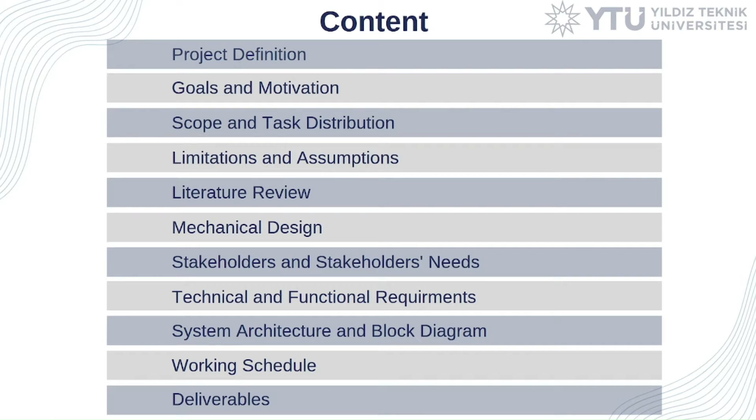Project definition. In this project, we aim to design and produce a 1/10th scale shared autonomous vehicle prototype. This vehicle will be able to travel to the passenger location with no human involvement, and the location will be provided by the user interface. The shared autonomous vehicle will perform operations such as lane tracking, classifications of objects, and path planning.

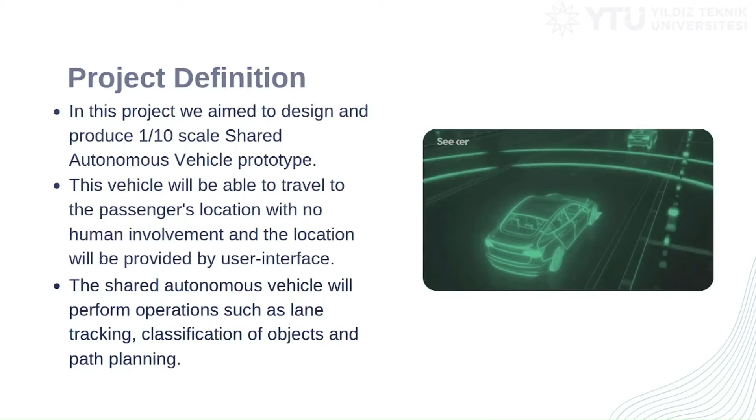Goals for the project: lane tracking with perception system, simultaneous localization and mapping, path planning, requesting the vehicle with a mobile application, and instant location tracking. Motivations for the project: bring a solution to traffic congestion, especially in large cities, with a shared autonomous vehicle culture, minimizing carbon emissions by reducing the number of vehicles in traffic, and preventing human-related accidents in traffic with the autonomous shared vehicle concept.

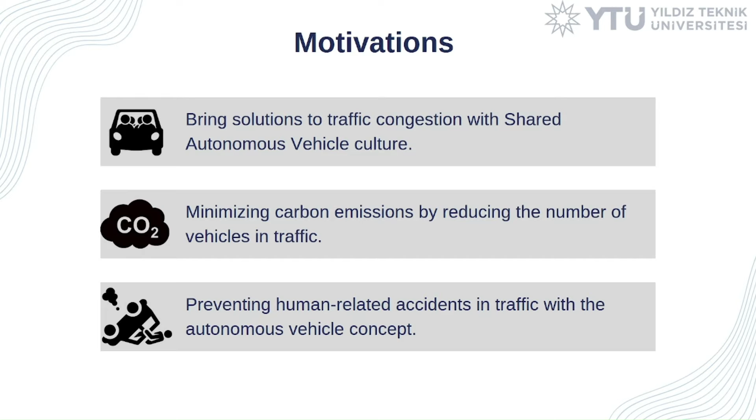Scope of the shared autonomous vehicle. This part consists of 8 subsystems. Power management subsystem, mobile application subsystem for design of the mobile application, driving subsystem for one brushless DC motor and one servo motor, and we will design and produce a motor driver card.

Motion control subsystem, lateral control with pure pursuit algorithm; communication subsystem, communication between our mobile application and vehicle; decision-making subsystem, simultaneous localization and mapping or SLAM, and path planning. Perception subsystem for object detection and classification, image segmentation, lane tracking algorithm, obstacle detection, and depth camera. Mechanical subsystem, 3D modeling of the vehicle, structural and stress analysis of the vehicle.

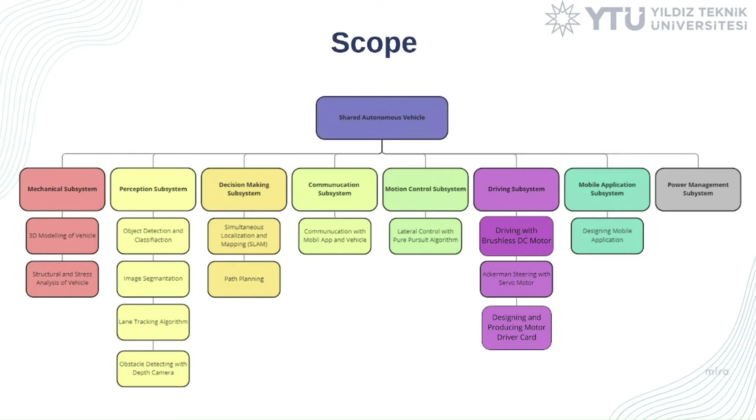Task distribution of the shared autonomous vehicle. In this part, each subsystem has a leader. Although all the members will participate in all the areas, the specific leader for the specific subsystem will lead and guide other members and will plan the progression.

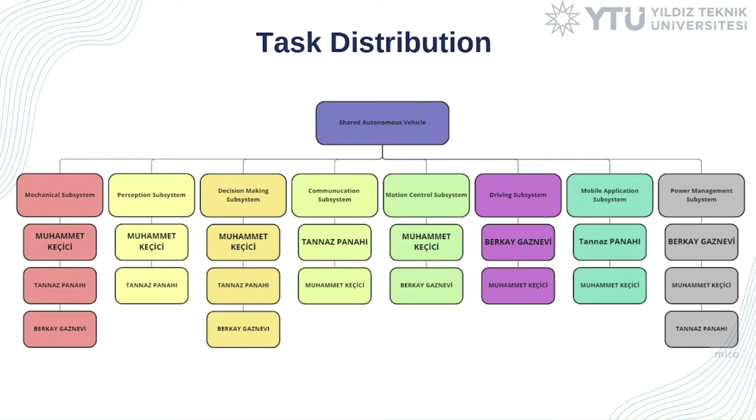For example, in mobile application and communication subsystems, which are led by me, I will be planning and mostly guiding the other members. Power management subsystem and driving subsystem are led by Berkay Gaznevi. Motion control subsystem, decision-making subsystem, perception subsystem, and mechanical subsystem are led by Muhammet Keçici.

Limitations and assumptions. It's hard and costly to design and produce a real-life size autonomous vehicle, so we will make a 1/10 scale prototype. There are no functions such as climb up or climb down because these functions change the driving dynamics. The vehicle moves in a two-dimensional plane, which is the XY plane. Functional charging stations were not designed and only assumed. They will be presented on the map as marked areas.

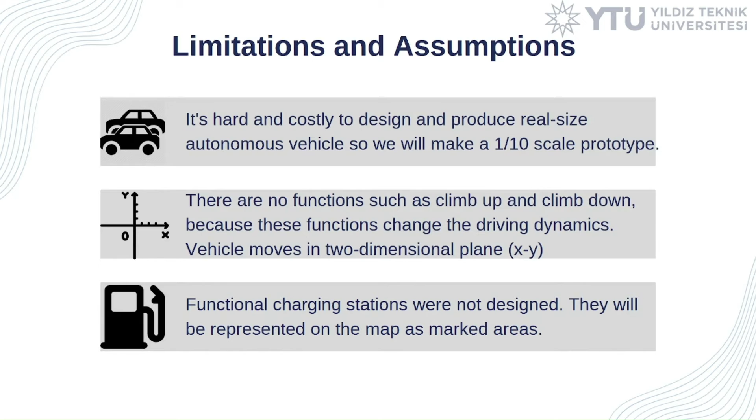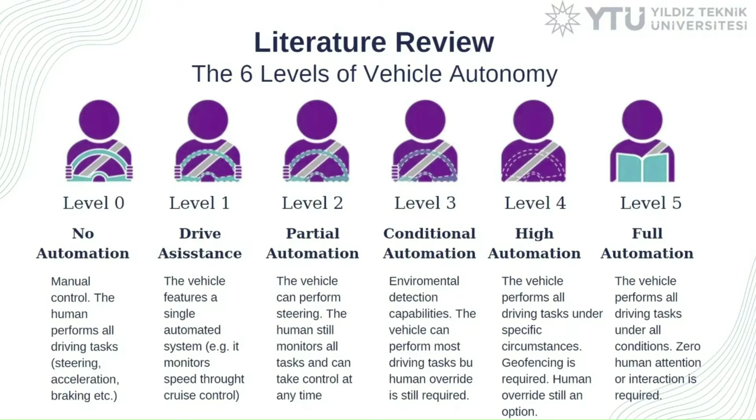Hi, I am Berkay Gaznevi. I will present this part of the presentation. After reviewing the literature, we saw some concepts and past projects. Now we need to explain some key concepts. The most important of these is the autonomous vehicle levels. You can see the autonomous levels in the table.

Another important concept is SLAM. The 3 most important features of autonomous robots are perception, decision and actuation. SLAM stands for simultaneous localization and mapping. It's the process of mapping an area whilst keeping track of the location of the device within that area. This is what makes mobile mapping possible.

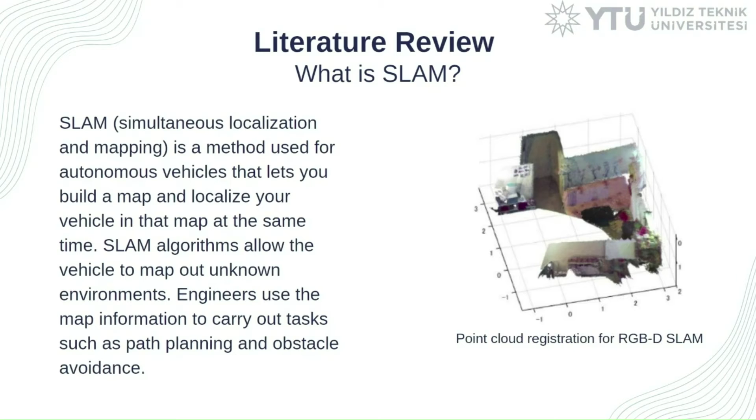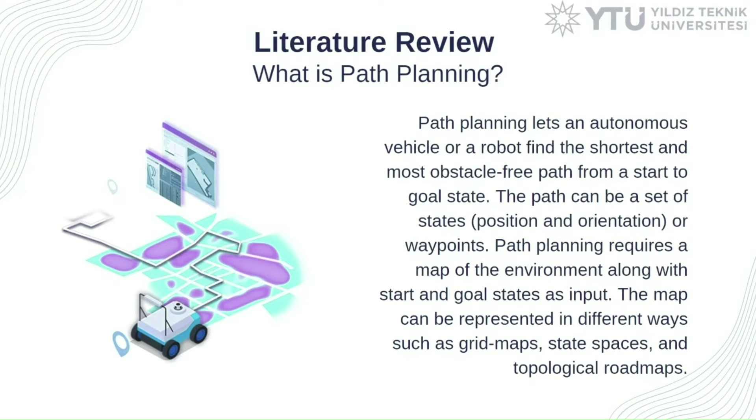The task of path planning for mobile robots is to determine the sequence of maneuvers to be taken by the robot in order to move from the starting point to the destination, avoiding collision with obstacles. Sample algorithms for path planning are Dijkstra's algorithm, A star, D star. A path planning algorithm may be based on a graph or an occupancy grid. We will use the A star algorithm.

Let's take a look at similar projects now. The first of these is the Google Waymo project. The project started in 2009. Google has produced many prototypes now. The most important of these is the Google Waymo One. The project is currently in the testing phase. It's called via a mobile application and autonomously goes to the marked point, but it cannot charge autonomously. Our project also includes autonomous charging.

Another similar project is MIT Race Car. This project is part of an educational robotics course at MIT. The mobile robot completes the track at MIT as soon as possible by recognizing its environment with a stereo camera.

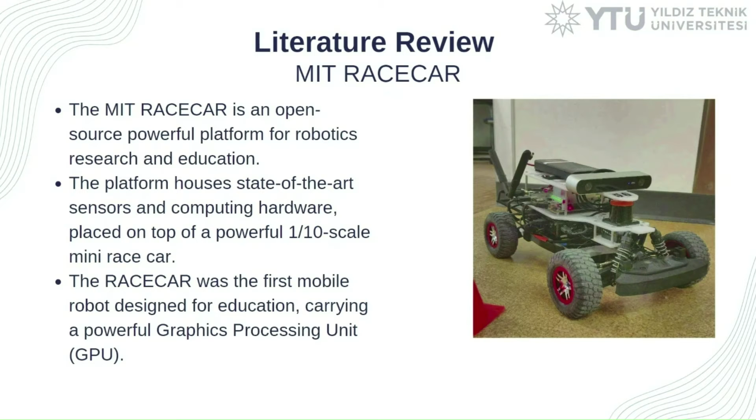The last one is the F1TENTH project. F1TENTH is a community of researchers interested in autonomous mobile racing cars. The community has four missions: build, learn, race and research.

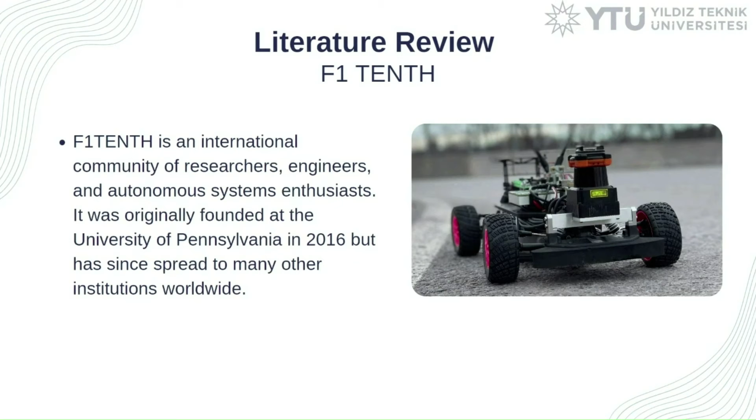Now I want to talk about mechanical design. Our prototype was designed as a 1/10 scale mobile autonomous vehicle. This 4-wheel vehicle consists of a plate placed on a chassis. The Jetson Nano depth camera is located on the plate, and at the bottom there is a battery, servo motor and driver motor.

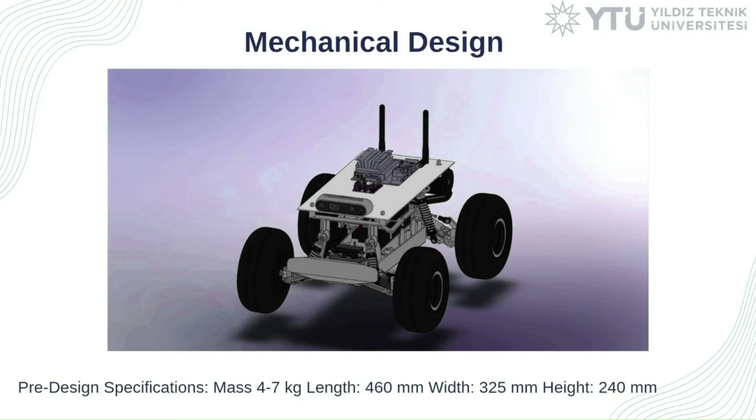Large wheel diameters are designed for ease of driving. The vehicle is planned to weigh between 4-7 kilograms according to preliminary design plans. It's 460 mm long, 325 mm wide and 240 mm high. This is how our vehicle looks from different angles.

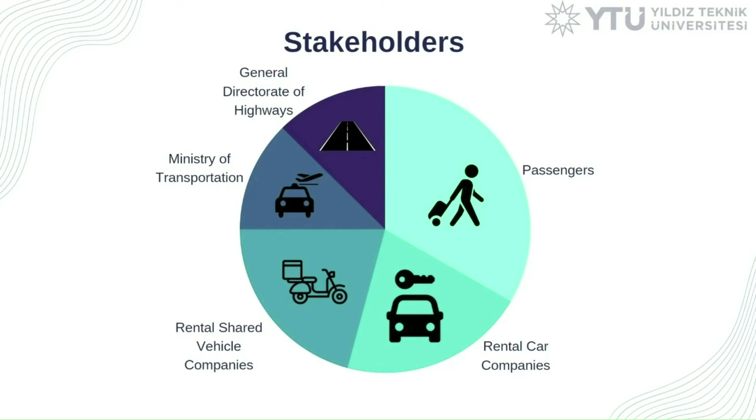We determined some technical requirements according to these stakeholder needs and listed these technical requirements as follows.

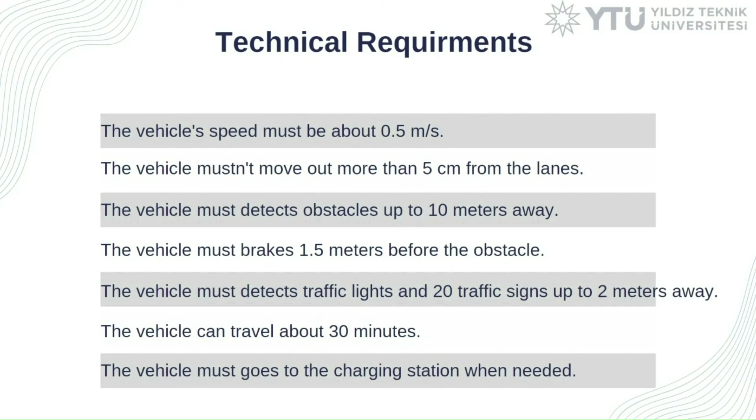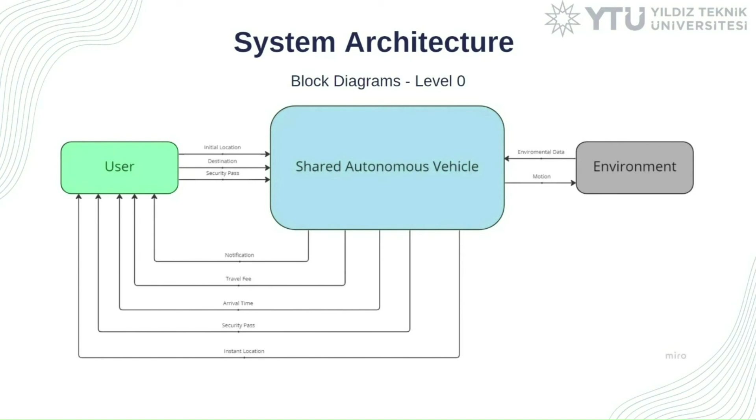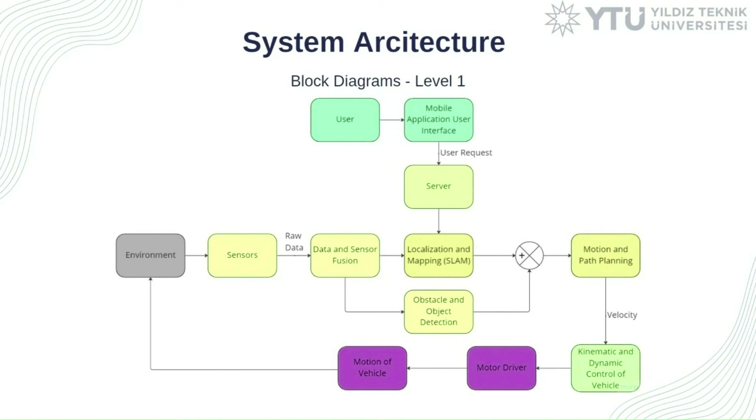The engines are driven by a specially designed motor driver and the vehicle moves. As the vehicle moves, its environment changes and the cycle continues until the vehicle reaches its destination. On this page, there is the flowchart of the process I just described.